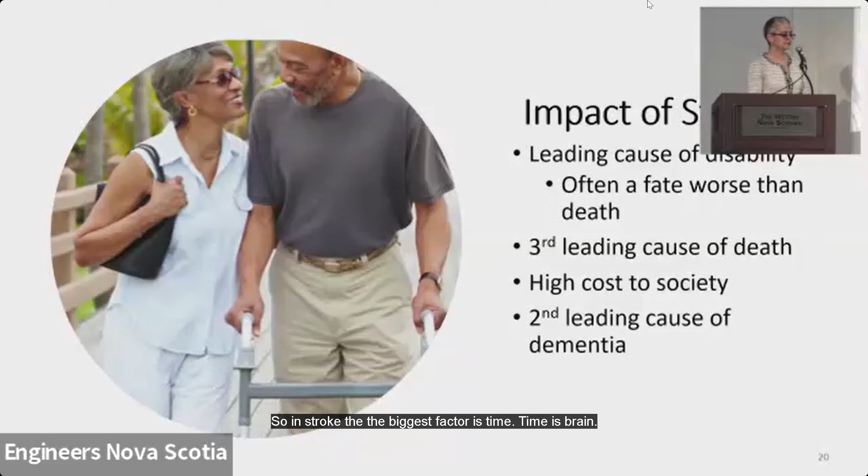In stroke, the biggest factor is time. Time is brain. From the moment the stroke starts, the brain starts to die very, very quickly. In fact, it's been quantified: there's 1.9 million neurons lost every single minute in an average stroke. That translates to 14 billion synapses in the brain, 12 kilometers of myelinated fiber every single minute.

So there's 2 types of stroke. The most common type is called an ischemic stroke. That's when a clot travels up through an artery and enters into the brain and occludes blood flow into the brain. This is around 75% of all strokes. The other type of stroke is called hemorrhagic stroke - that's when a blood vessel bursts in the brain and you start to bleed inside the brain.

The good news is that ischemic stroke is treatable, but there are 2 main types of treatment. The first is a medical treatment called Alteplase, or TPA, which stands for tissue plasminogen activator. It was proven in the mid-1990s. It's been around for quite some time and it's fairly effective - around 10 to 60% of the time.

It's fairly widely available at all primary stroke centers. To give you an idea, there are 10 hospitals across Nova Scotia designated as primary stroke centers, so it's pretty widely spread out with good access for our population.

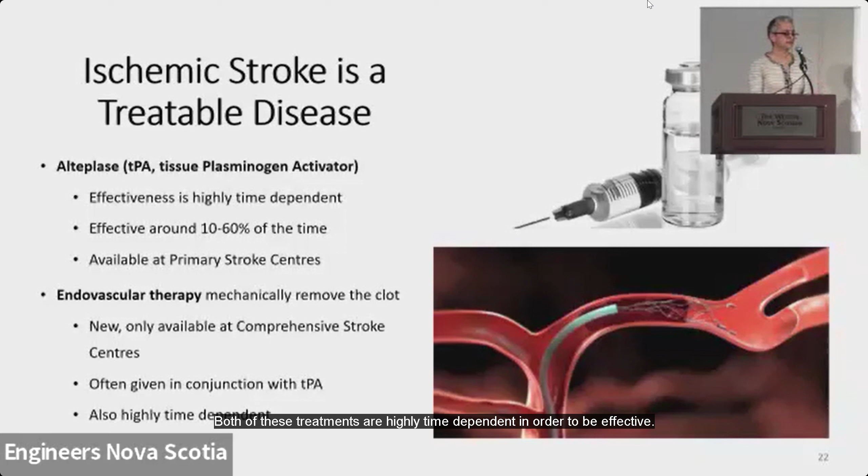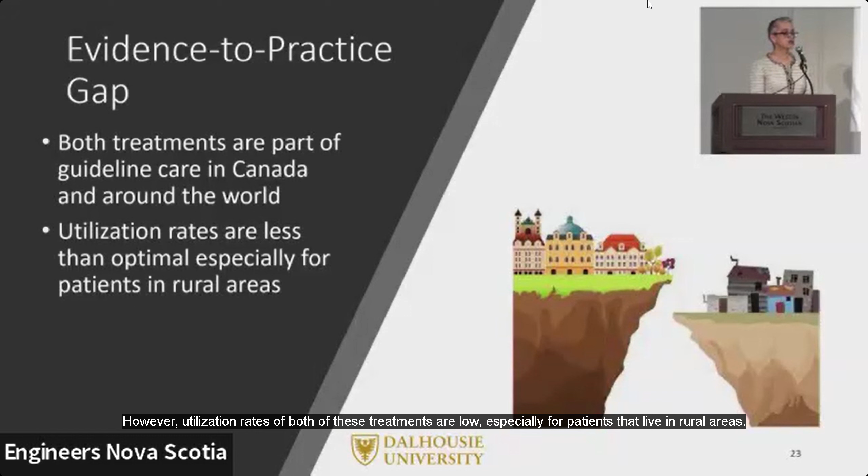Both of these treatments are highly time dependent in order to be effective. So there's currently an evidence to practice gap. Both of these treatments are part of guideline care in Canada and around the world, however utilization rates of both of these treatments are low, especially for patients that live in rural areas.

This has a much larger effect in Atlantic Canada. We in Atlantic Canada live much more rurally than in other parts of Canada. So across all 4 provinces, between 41 to 53% of our population lives outside of the cities. If we compare this to BC and Ontario, it's only 14%.

On top of this, rural patients have less access to these treatments, and we also have a greater incidence of stroke than other parts of Canada. Even not considering age - we standardize for age using statistical methods - around 140 strokes per 100,000 people occur in Atlantic Canada. If we compare this to Ontario, it's 113 per year out of 100,000 people.

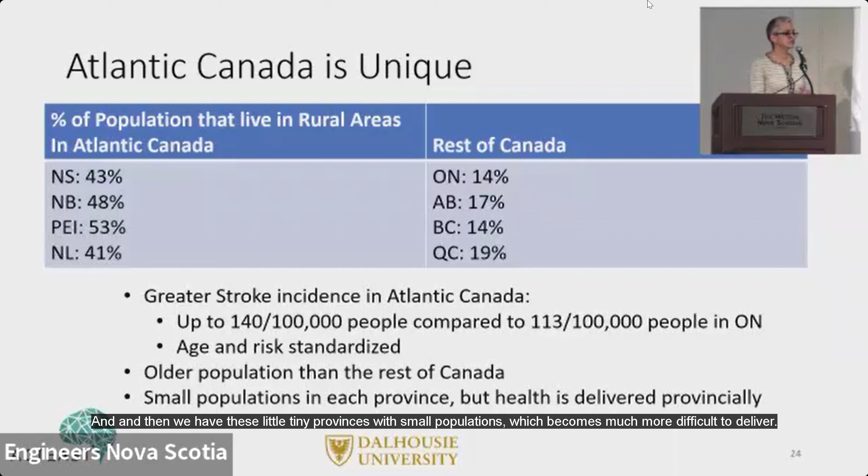On top of this, it's compounded because we have an older population. We tend to have a sicker population in terms of our chronic diseases. And then we have these little tiny provinces with small populations, which becomes much more difficult to deliver health services because health is delivered on a provincial level.

So how are we going to make these changes? I'm going to build on previous work. I come here from Alberta, and I led a big initiative in Alberta to make these improvements.

Here's a visual abstract of the work I led in Alberta. It was published in the Stroke Journal. The actual intervention was called an improvement collaborative.

We analyzed the data before we did the 1-year intervention and compared it to after. The door to needle time, that's the time from arrival at hospital to start of Alteplase treatment, dropped from 70 minutes to 39 minutes. We almost cut it in half.

What does this mean for the outcomes of stroke patients? We increased the proportion of patients that were able to be discharged home rather than going to long-term care or a rehab facility, from 45.6% to 59.2%.

Here's some images of the learning sessions. These were 1-day workshops held throughout the 1-year period, and there were 3 of them held. All of the stroke hospitals assembled improvement teams and then we got together.

We shared our learnings, how to make improvements, but we also had a lot of cross learning between sites. Sites presented on what they were doing and were able to learn from each other. So there's this peer-to-peer learning aspect there.

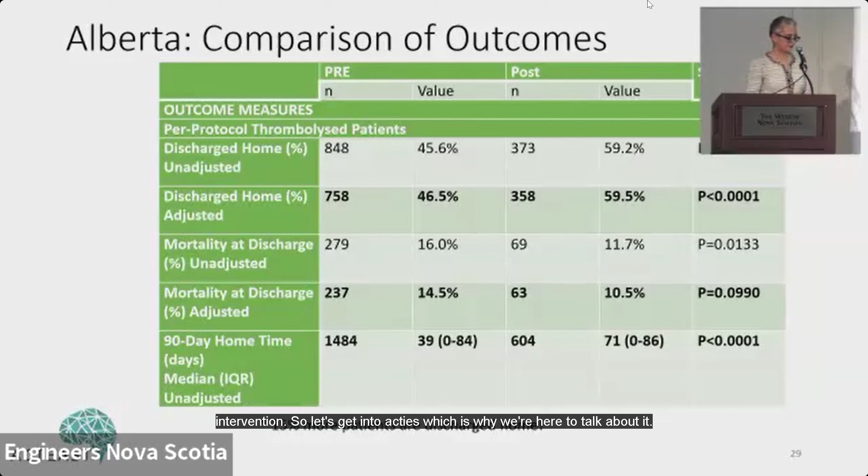So let's get into ACTEAST, which is why we're here to talk about it. We're still in the process of it, so I don't have the effect of the intervention yet, but we'll talk about what we're doing.

In terms of funding, I received a very nice grant from CIHR, very honored to have received it. It's a highly competitive grant to get, around 15% of all profs that apply for it actually get it. So I got that, most of the funding, $317,000.

I also got $25,000 from Alberta, got to use their money around here as much as possible. I got $6,000 from industry, and hopefully we can increase industry funding for this type of stuff. Nova Scotia Health also contributed for travel for their employees.

So what are the objectives for ACTEAST? The main objective is to increase the proportion of ischemic stroke patients that receive either treatment by 5%. We want to reduce the time to treatment, from arrival to start of Alteplase treatment, to a median of 30 minutes.

We want to reduce the time to endovascular treatment, from arrival to groin puncture, that start of the endovascular procedure, to a median of 60 minutes. For all those patients that need to get transferred from the primary stroke centers to the comprehensive stroke center where the EVT is offered, we want to improve efficiency of transfer. That's door in, door out time, arrival at hospital to when they're leaving that hospital, to a median of 50 minutes.

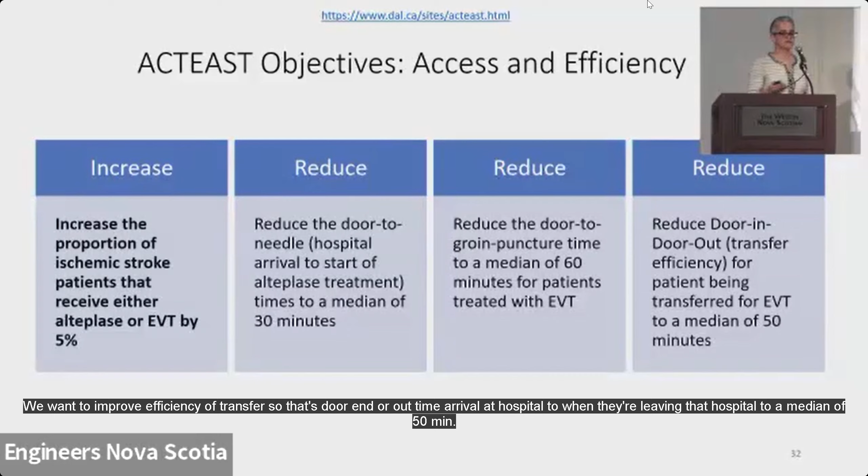So here's the actual intervention. It's a modified improvement collaborative. This particular intervention comes from the Institute for Healthcare Improvement, IHI, out of Boston.

Similar to that image I showed you in Alberta, all of the stroke hospitals enroll an improvement team. That's an interdisciplinary team made up of paramedics, nurses, physicians, CT technologists, radiologists, and they are all the people involved in treating that patient.

They come together for that first learning session, a one-day workshop. During that workshop, they also start to plan what they're going to do and let everyone know about their plans. They then go into that first action period when they're actually carrying out that plan.

A couple of months later, we do another one-day workshop, and this one has more peer-to-peer learning. They talk about what they're doing so that they can learn from each other. Then there's the final second action period, supported through site visits, webinars, data collection, and data feedback.

This entire process takes 6 months. There are dates here which I'll get to in a second, but let's talk about what changes people are actually going to do. They get a full change package that goes into the changes in more detail. If we go through this process diagram, all the actual improvements are highlighted in yellow.

It starts with the stroke. The ambulance comes, picks up the patient, then pre-notifies and pre-identifies the patient on the way to the hospital. The stroke team can then prepare, pre-register the patient, and look up their medical history. When they arrive, there's a quick assessment. They keep the patient on that EMS stretcher and take them directly to the CT scanner, which confirms it's an ischemic stroke. Even before that, you can clinically confirm it's a stroke and start planning for the transfer while the patient is still in the CT scanner. Then if the image shows the right indications, they can start Alteplase treatment right in the imaging area and transfer the patient immediately for endovascular treatment.

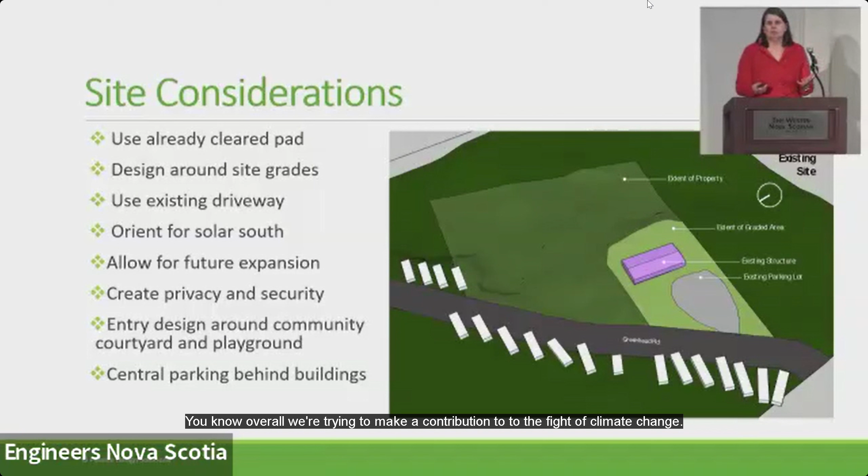We wanted to use the already cleared pad that was cleared for the school to reduce the impact by cutting more trees down. Overall, we're trying to make a contribution to the fight against climate change, so we don't want to start by cutting down a whole bunch of trees that are helping in that.

We did a lot of work to design around the existing grades so that we could save construction costs on cut and fill and blasting. We used the existing driveway and oriented the buildings as best we could to the south so we can get free heat from the sun as well as daylighting, which reduces the amount of lighting energy used. I already mentioned the orientation around the playground, and we kept the parking behind the buildings.

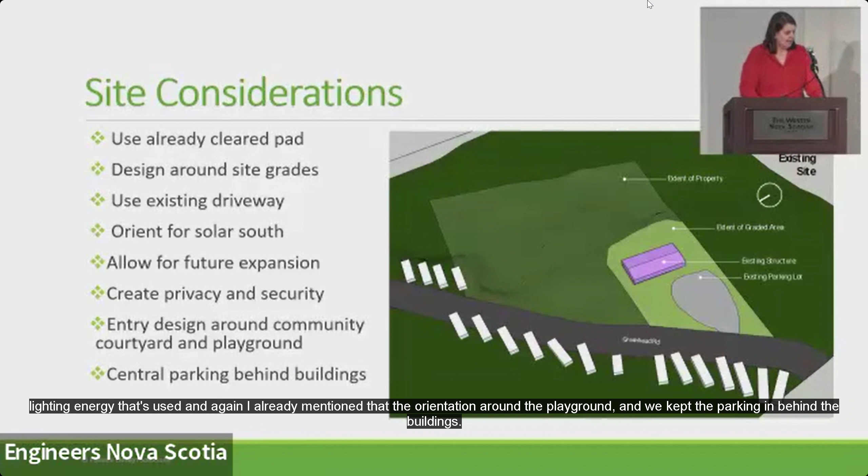This will be a little difficult to see, but the community center is the building on the far left. We divided the units into 4 separate buildings, which allowed us to keep them as Part 9 construction and avoid the incremental costs of Part 3 commercial construction, like sprinklering and other requirements of the building code. Each building is under 600 square meters to qualify as Part 9 buildings.

We use simple building shapes in passive houses because they're more energy efficient, but also cheaper to build. So then we have the challenge of trying not to make them look like Soviet block housing, and instead make them interesting. Molly Merriman is the architect on the project, and she's my guest here tonight—that was her job in the project.

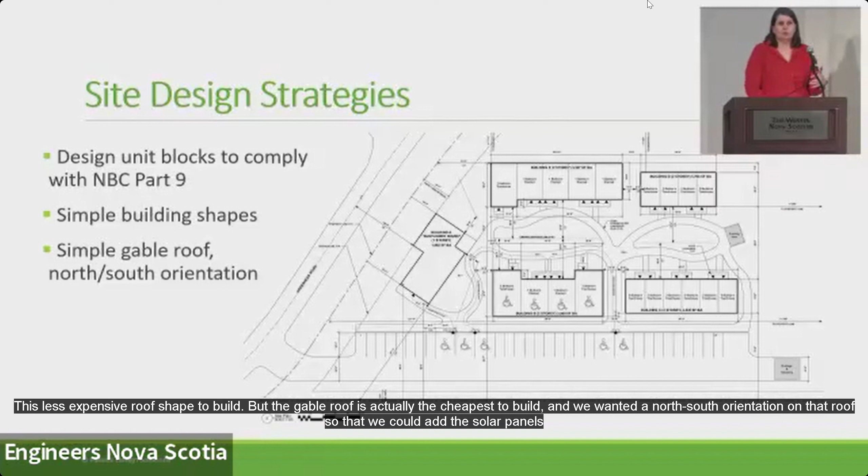We used a simple gable roof, much less expensive to build than others. Lots of people think a shed roof should be the simplest, least expensive roof shape to build, but the gable roof is actually the cheapest. We wanted a north-south orientation on that roof so that we could add the solar panels we needed to get to net zero.

I always tell people about 50% of a passive house's efficiency is achieved during design, and about 50% is achieved by what you put in the building. So you want to utilize your design as much as possible because it's the most cost-effective way to get to net zero. Simple things we did, like eliminating structural bearing in the demising walls by running the trusses back and forth on the building.

We stuck to 2 stories for the buildings, which eliminated extra egress stairs to a 3rd floor. We minimized exterior maintenance by designing for interior stairs only—all these fire escapes and exterior stairs are really difficult to keep maintained. We used small windows that operate, since big, heavy triple windows tend to need more service. And we have a single entry, as I mentioned, from the courtyard.

So then it's affordable housing. We have a fixed budget; we need to make it cheap. So what are the strategies we can implement from a design perspective to impact the construction costs?

We had a great structural engineer on the project, Andrea Doncaster, who's a Dal graduate and then taught at Dal—many of you may know her. She really worked with us to minimize the structural elements as much as possible. A simple thing like engineering a 6-inch frost wall instead of an 8-inch frost wall reduced our concrete by 25% on the project. Concrete, steel, and glass are the building materials that have the most embodied energy, so if we're trying to get low carbon buildings, we want to reduce our use of concrete.

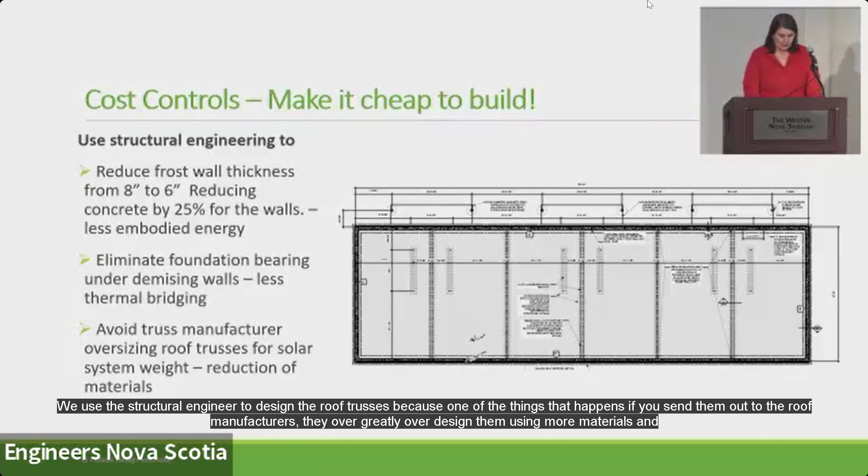Most of the buildings have that front-to-back gable. We did, for architectural interest, put a front gable on some of the buildings, which are just basically false gables sitting on the simple front-to-back gable—keeping it really simple to build and giving us enough area for the solar panels to face south. The roof was built on the ground and then craned into position.

To save staging and all the labor that goes into the up and down of building the roof on the second story. So what kind of assemblies do we need in this kind of building to make it a passive house and achieve net zero?

One of the cheapest things we can do is add blown-in cellulose in the attic. It's cheap, it's locally made, it's 98% recycled. So we just use standard roof trusses with a whole bunch of blown-in cellulose in the attic.

The wall is the tricky part because there's a lot of elements that have to interface with the wall, your windows, your doors, making sure we don't have thermal bridges at the connections to foundation and to ceiling. So we used a double stud wall that was made in shop. The framing was made in a shop and then craned into position, as part of meeting the panelization requirements.

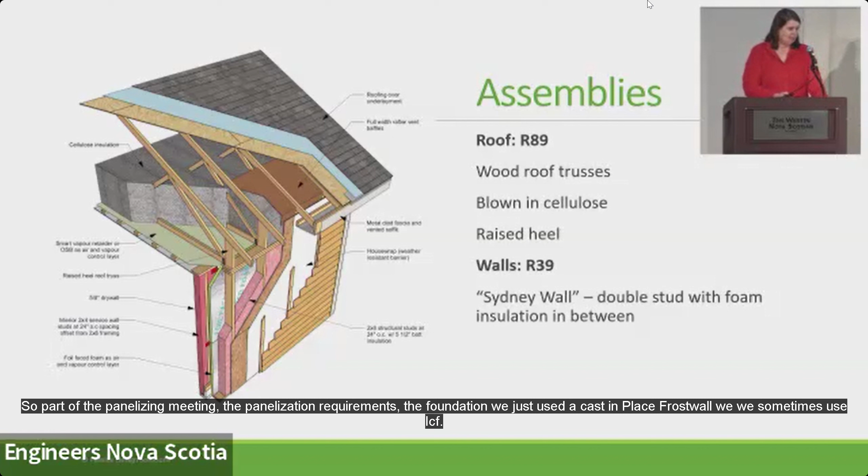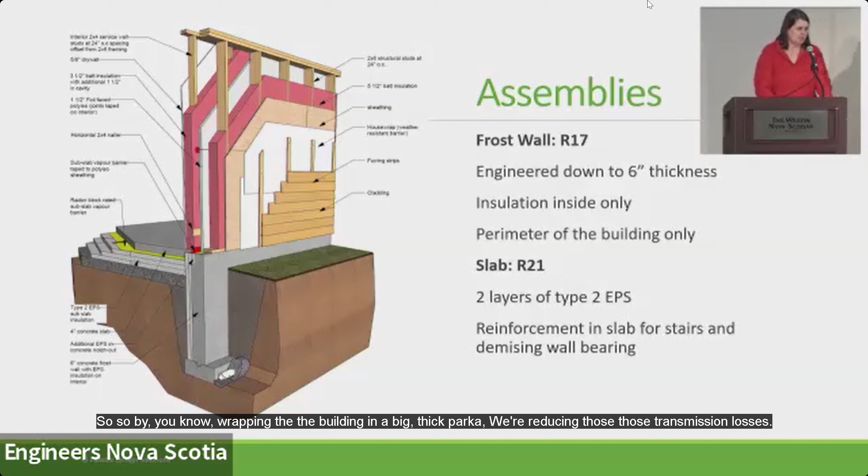So by wrapping the building in a big thick parka, we're reducing those transmission losses. Larger buildings are more energy efficient because their volume to surface area ratio is better, so we can thin those walls down. Sometimes we need our R-50 to achieve the efficiency in smaller buildings.

What we're really trying to do is use the energy modeling tool during the design to optimize - is it cheaper to put solar panels on the roof, or is it cheaper to add another inch of insulation in the attic? By doing sensitivity testing with the energy model, we can determine that as we go through the design.

Air tightness is a huge part of a passive house. A typical passive house is about 6 times tighter than a standard code built house. And the research shows that about 40 to 50% of all heat loss is through air leakage.

It also leads to huge building durability issues. Moisture is carried into the wall by air, and when you build really thick assemblies, moisture can go in quickly with the air, but it only can diffuse back out slowly, leading to rot, mold, and building failure. So air tightness gives us that energy efficiency, but also building durability.

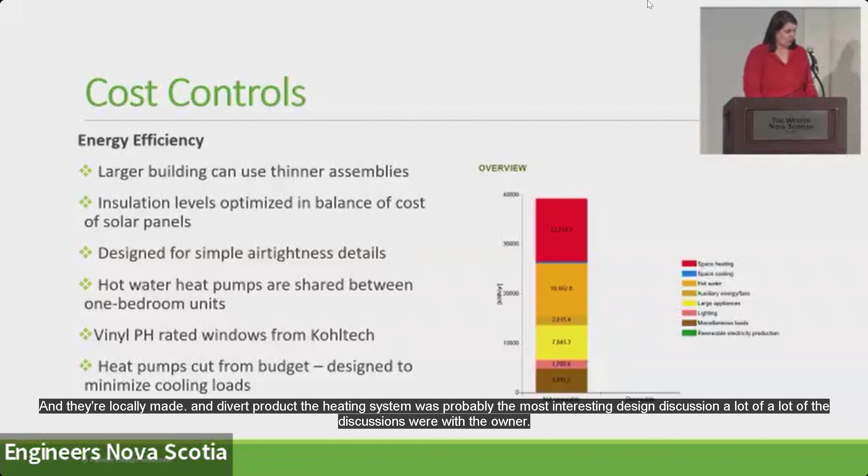The heating system was probably the most interesting design discussion. A lot of the discussions were with the owner. So yes, we want the most efficient energy heating and cooling system, but in this kind of project, we need to consider the end users and the operator.

So we looked at having a ducted heat pump system with some central controls, but it was too expensive. We looked at using electric baseboards in conjunction with a single ductless mini split, but there was a feeling that the tenants would use the electric heaters because they're simpler to operate, so the effectiveness of the heat pump would be lost. People will leave the windows open and run the cooling, and there's really no way to control that from a user perspective. And then there's a really high turnover in their occupancy.

So ongoing training of how to use the system is an issue - a lot of these tenants are coming from living off the street. So giving them a complicated remote control for a ductless mini split is not a good option to keep their life simple. In the end, we decided to put in electric baseboards. You turn a knob, the heat comes on, you turn the knob, the heat goes off - very simple to maintain and inexpensive to install.

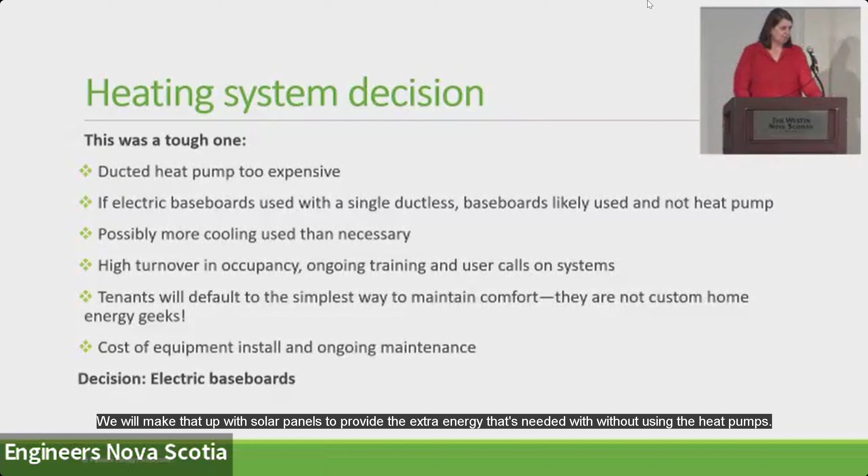So what were some of the key aspects that got this project ready to build in short order? We had a highly collaborative team. We had sub-consultants that were really willing to work with us around the kind of strategies we wanted to implement from an energy efficiency perspective.

As I mentioned, the energy modeling shouldn't be done at the end. It should be done during design, so you can use that input to affect your design decisions.

Using locally available materials put together in a different way to achieve a high performance building gets you over that hurdle of change with the labor, but it's also very cost effective and provides local service. Now the construction update.

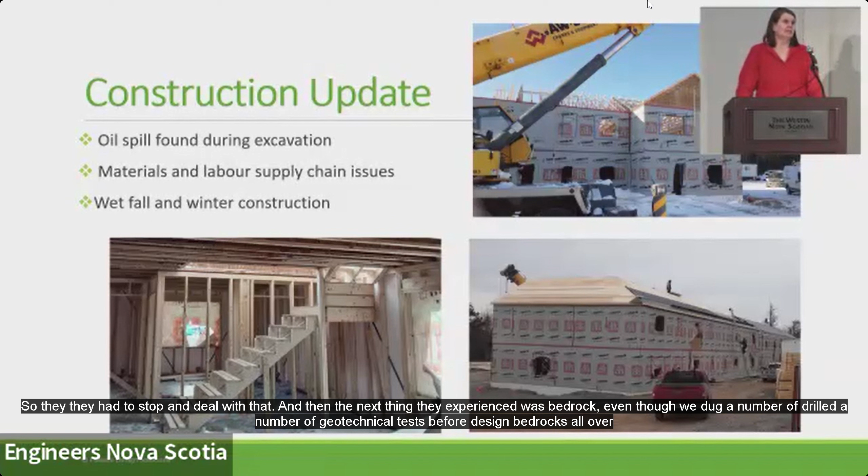The first problem they had on site was they discovered an oil spill from the old school, so they had to stop and deal with that. Then the next thing they experienced was bedrock. Even though we drilled a number of geotechnical tests before design, bedrock was all over the place, and we had to do a lot of re-engineering to work around it.

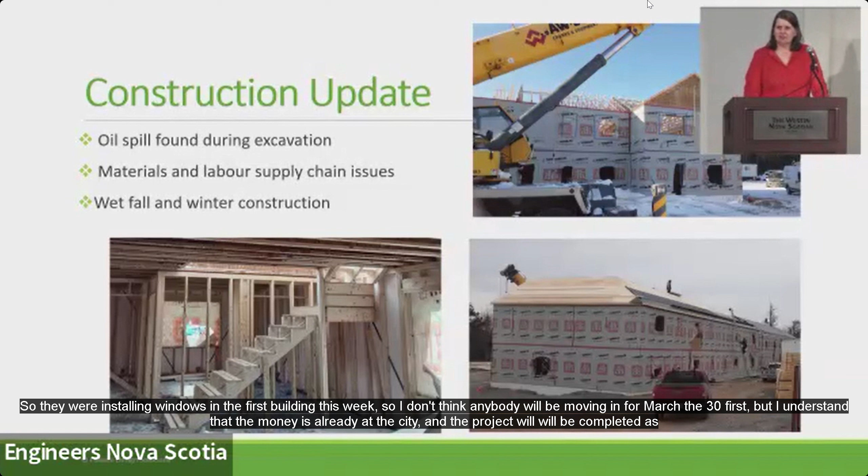That brought us into winter construction, so they were installing windows in the first building this week. I don't think anybody will be moving in by March 31st, but I understand the money is already at the city and the project will be completed as soon as possible. That's it, I'm happy to take questions.

Looking at this house, there's a fair amount of engineering compared to a traditional house bought off the shelf. In terms of the cost, on this type of multifamily building, that engineering would be required regardless of whether it was a passive house or a non-passive house.

There was some special engineering that needed to be done around the fastening schedule between the two panels, but other than that, all the other aspects of engineering, including engineering the trusses for solar, and mechanical and electrical engineering, must be done regardless.

I'd say way less than 1% of the soft costs were related to services directly related to upgrading to passive house. Before COVID in Nova Scotia, we could actually build a passive house for the same cost as a code-built house, because we could get a $10,000 rebate from Efficiency Nova Scotia and eliminate the central heating system, and those two things would add up to the incremental cost of upgrading to passive house. I don't know where costs are these days, it's so hard to keep track of them, I can't claim that anymore. But normally we tell people about a 5% upgrade in the construction budget to upgrade to passive house.